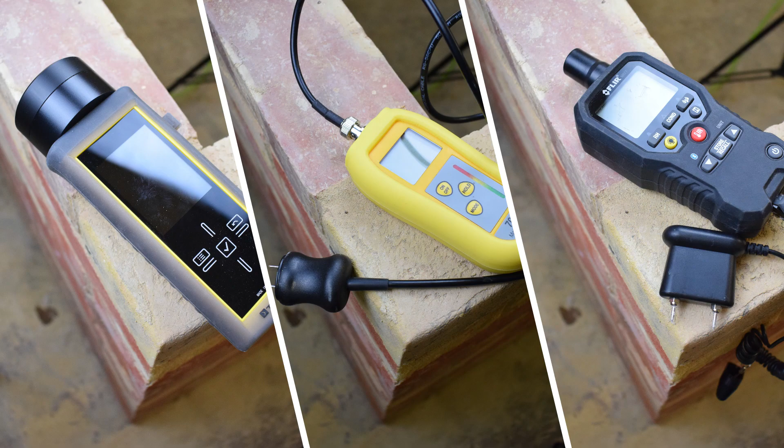This is going to be our first in-depth video where we're doing a bit more focus. Like I said, we've done the intro, now we're really getting into the nitty-gritty. So today's video, we're going to look at moisture meters. Every surveyor is pretty much armed with one, and this is why we think it's a good place to start. We're going to be looking at an array of models and comparing and contrasting them on our test wall.

So we've got a complete array of different units to look at. We're going to be going from old to new, not necessarily in that order, but we've got some old stuff, some new stuff, some really high-end stuff, and some more budget models as well, so we're going to be looking at how they compare. We've also got some that work with the pin function, and then we've got some that are looking at the scanner pads on the back, so we're going to be looking at how they compare and contrast as well.

We know there are obviously limitations to each of those, but we're going into a bit more detail, and hopefully once we've got our results we'll be able to explain that in more detail as well, assuming we get the results we want to, of course. What we'll look to do is try and get some results up there so you can see a table as to how they all compare and the different readings, and we're going to be as completely honest and transparent as we can. So what we get, we're going to hopefully show you, and you can see how they compare and contrast.

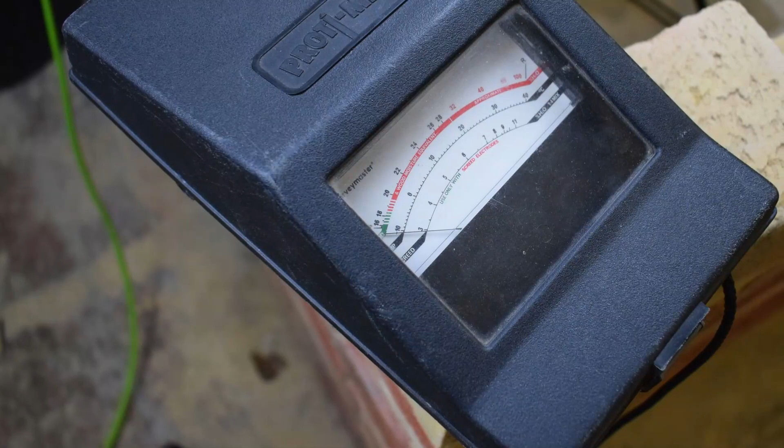So I'll look at some of these meters in a bit more detail now. We're going to start with probably our earliest model that we're going to try and test, a Protimeter SurveyMaster. If you recognise this, you're probably showing your age as well - an older model, pins only, very early, I think from sort of the early 80s, well before my time, of course. Something a little bit more modern is a Protimeter Mini, again with a pin function, and we'll be looking how that compares as well. This is from the early 90s, something like, I think 91.

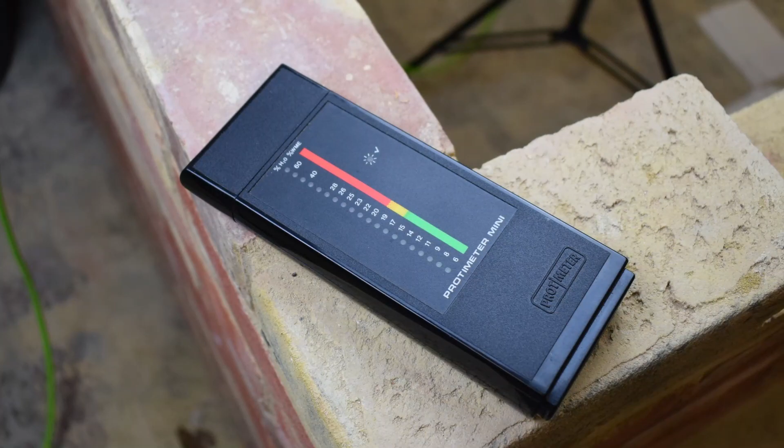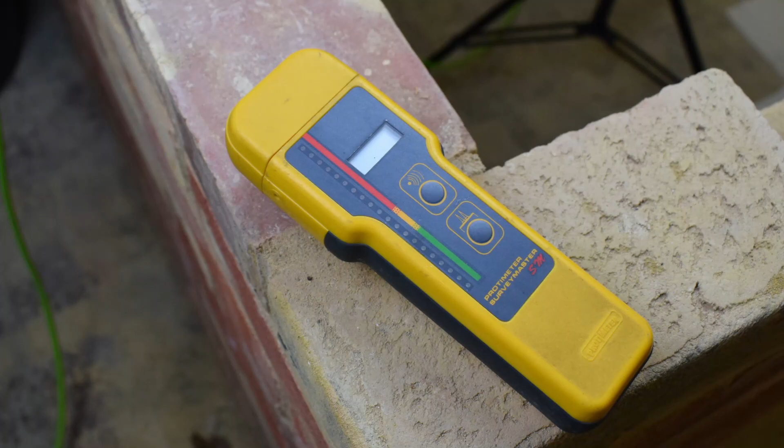Some of the more modern ones, again, Protimeter - this isn't a plug for Protimeter, but it's one of the more common models or bigger brands on the market, so that's just naturally how we managed to pick up a bit of an archive of Protimeters. So we've got a SurveyMaster SM, quite a familiar one - I'm sure most of you might even still have this model and still be using it, with pins and scanner pads as well.

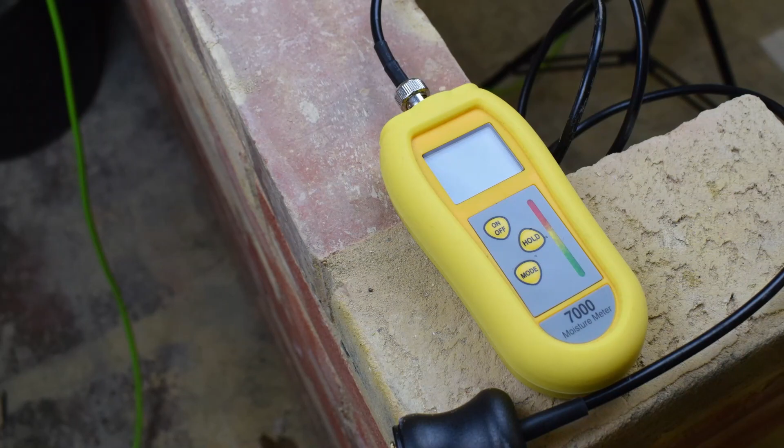One that's a bit more unusual, this is an ETI moisture meter. It has an attachment with pins, not too dissimilar to some of the ones we'll be looking at. Not overly expensive, but we'll have a look and see how it compares.

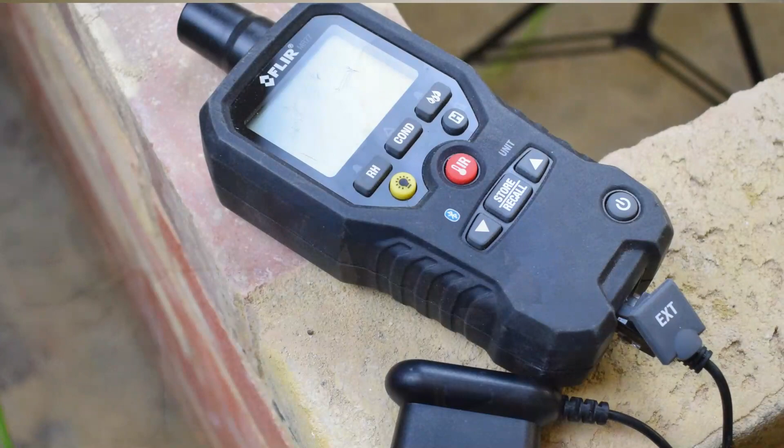This is sort of towards the higher end, a very good model. It has additional functions as well, so relative humidity and things like that. Obviously not going to look at that so much today, but it's on there, along with a surface thermometer.

And the same with the E-Tech as well, not too dissimilar to the model we've just looked at, but even from the casing you can see it looks very, very similar. But how do they compare in real life?

The anomaly in the group is probably this one, the Trotec, I think it's called a T660. This works off a slightly different technology, a microwave meter. It's not ideally set up for what we're going to do today, but we'll have a go with it, have a look, and see how it compares and contrasts, and how the readings differ.

So just to give a bit of background as to what we're going to do today in our experiment: we've got a test wall. What we're going to try and do is take readings from various heights up the wall, three locations for each of the meters. We'll take one from the skirting, one just above that level at the mason plaster level, and then one towards the top middle of the wall. We'll plot the results up there so you can see it, so we'll have a skirting, height A, height B, and we'll record that.

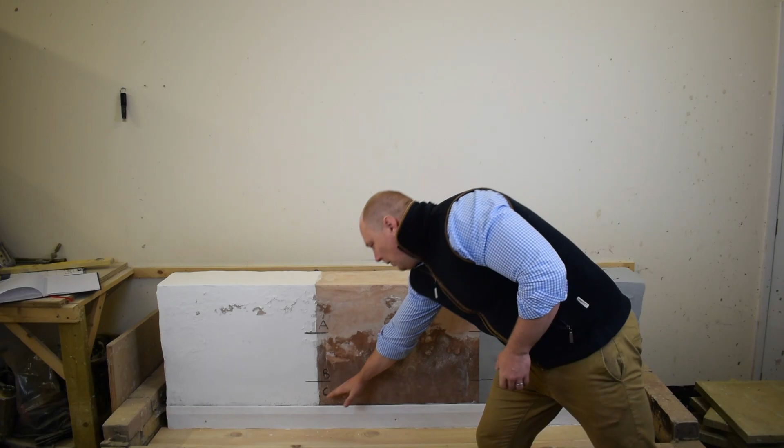You'll now be able to see what we've done is we've marked out the wall. Very conveniently, above the floorboard level it's around 600 mil, so we put markers every 200 mil. What we'll try to do is make sure all the readings we take are in the same area, so we can compare and contrast, one from skirting, one from section B or C, then one from section A, and then we'll plot them for you.

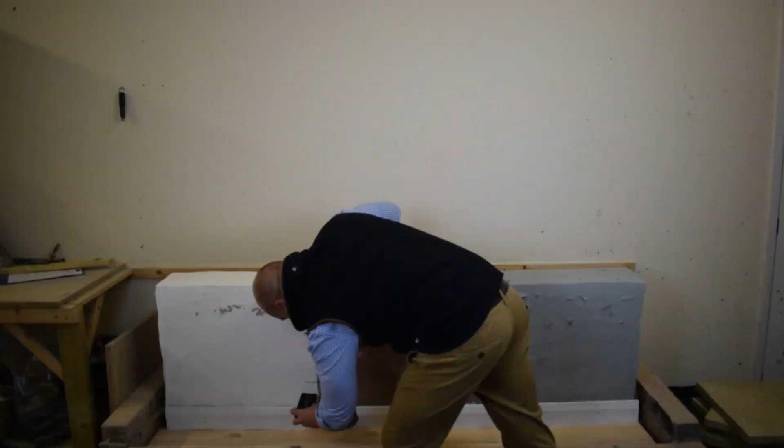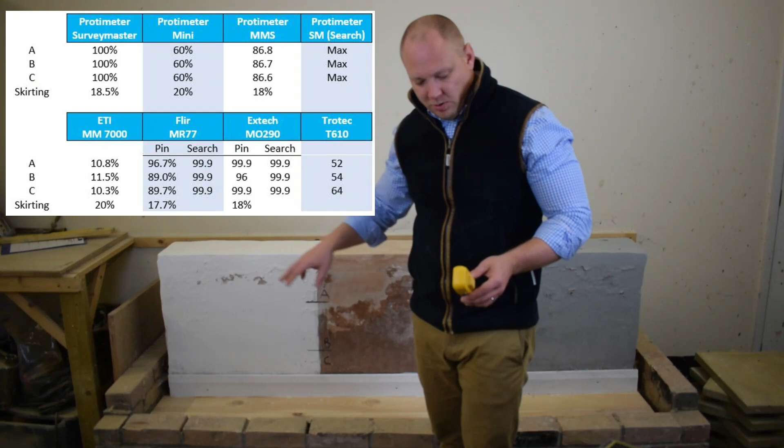A lot of the meters we've used so far have only got the pins, so most of the readings we've recorded so far are just on that. Some of the more modern ones we're going to start looking at, such as the Survey Master SM, have the scanner and the pad, so we'll be taking two lots of readings from these at each of the various heights. So you'll see us changing tack slightly, using the pins as well as the other facilities.

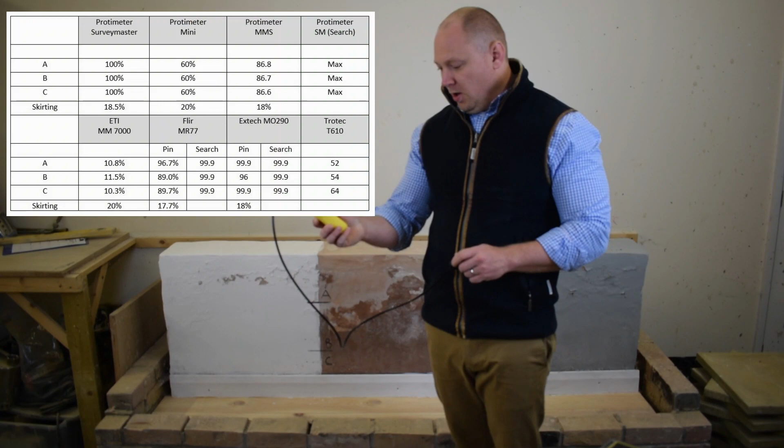So this is one of our more modern moisture meters, the ETI Moisture Meter 7000. It again has the pins, and there are various settings on this. We're going to use it on the plaster mode while we do the plaster, and then adapt accordingly for the skirting board when we get there.

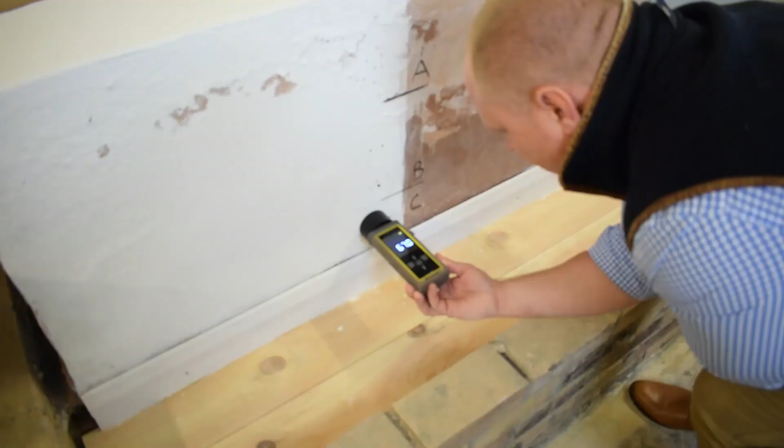So this one's the Trotec, our most modern acquisition. We have to let it calibrate for a little while, holding down the button. In theory, you're meant to use this in an upright position. It requires a monolithic structure, so you need the depth of the substrate to be around 200 thick, which we've got around there, so we'll see how we get on.

So we've taken all our readings from our wall, as we were kind of expecting. There is a bit of an array in the results, and that's for reasons we'll start going into. You'll notice, unfortunately, as is the joy of working with some of the old equipment, you don't always get it to work perfectly, so some of the moisture meters haven't worked entirely correctly. But that's all part of the experiment, and goes to show we are doing this properly and live, and we're not trying to pull punches or hide anything from you.

One of the moisture meters, unfortunately, on its pin mode just didn't work, but there we are. So we've got our wall, and you can see we've got varying results up the wall, which I'm sure won't be a great surprise to any of you. Moisture meters are virtually all calibrated to timber, which is why for the results we got from the skirting board, there is a great amount of consistency. They are all very, very similar, within a few percent of each other, which was entirely what we were expecting.

I was expecting a slightly higher reading, but unfortunately I think where the skirting has got a bit bowed, perhaps, the readings aren't quite as high as what I was anticipating. What it's shown us is that all those moisture meters, when working in timber, give us a reasonably accurate scale. They were all slightly elevated, with one or two peaking around 20, which is where we'd start getting a bit concerned.

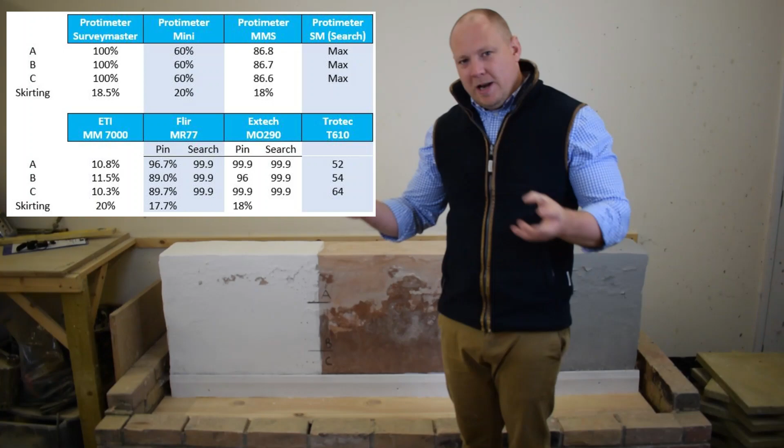Any moisture meter is only indicative - a high reading tells you there's something to investigate. We knew there was something to investigate, you can see the dampness. So actually the readings we've got are no great surprise. It's telling us it's got a wet wall.

Actually the figures quoted on the masonry itself, the plaster, are almost meaningless. All it's telling us is we've got a problem, we need to investigate, we need to do some other testing, and that leads us on to the other series of videos we're going to be doing. So this is our first one.

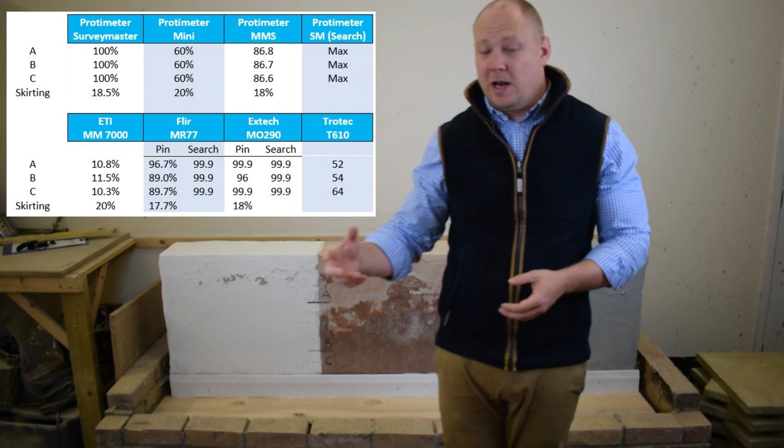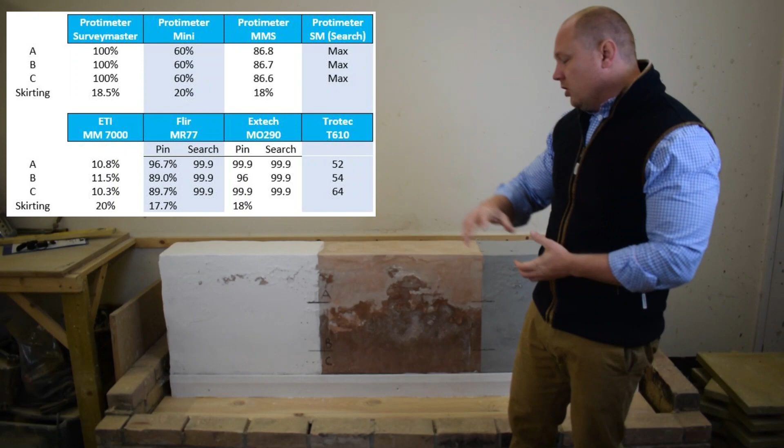We're going to be doing some more interesting and quirky stuff. This was sort of an initial taster, and it's got us to what we're expecting to get. Moisture meters are only as good as the person that wields them. You shouldn't be looking at single readings in isolation - you should be looking at indicative profiles.

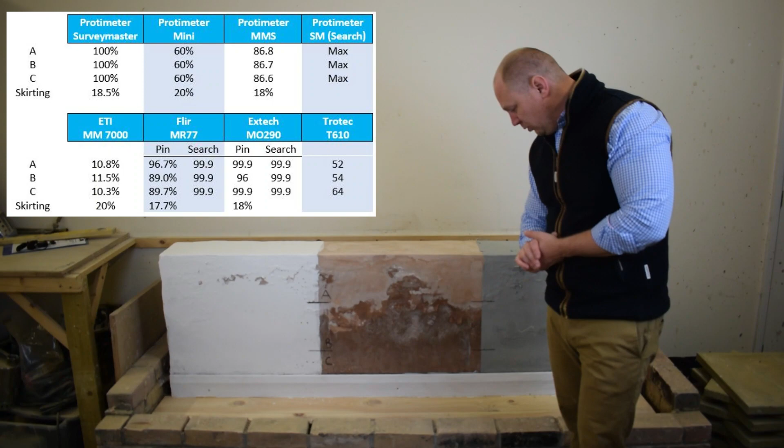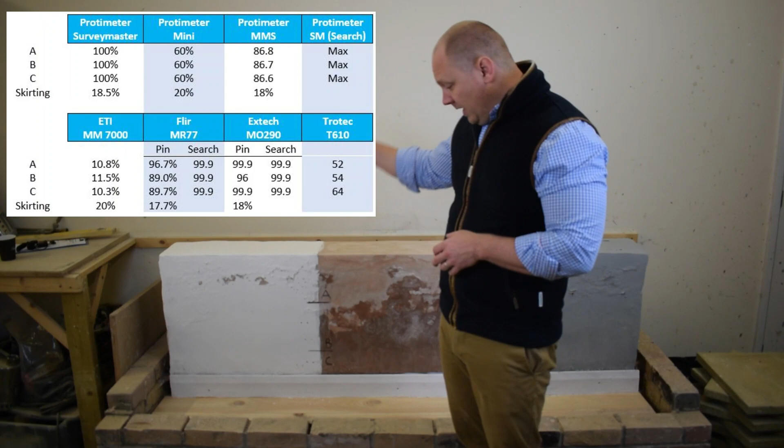Unfortunately the section of wall we've got here is quite small. We're only going up to 600mm from the floorboards, and you've probably only got an extra 200mm below that. Another important consideration with the moisture meters is that it's the profiling that matters and the distribution of the readings.

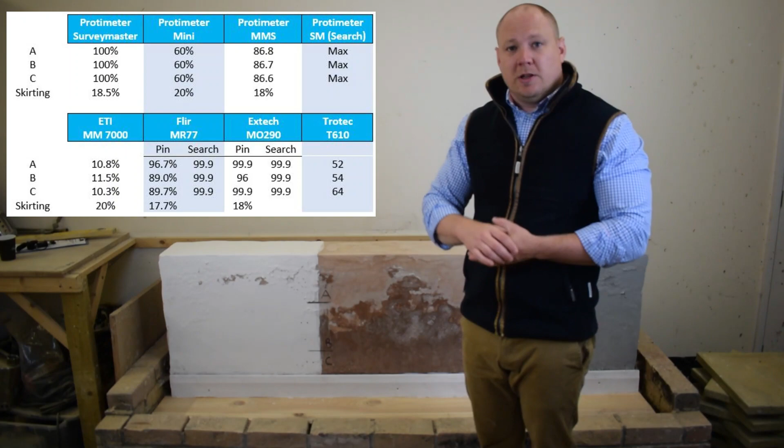If you're getting a negligible reading on a moisture meter, then there probably isn't a problem. If you get an elevated reading, then it's probably cause for more investigation. That's what they're used for - they're there to give you an indication of whether there might be a problem, and you should be using it in conjunction with your visual evidence and things like that.

The other thing they're really limited to is they cannot tell you where that water is coming from, if it is water causing it. It could be condensation, it could be rising damp, or it could be rainwater coming through the structure. All it's going to tell you is whether there's resistance through the meter - it will give you a beep or an elevated reading, but it won't tell you where that moisture is, or what the cause of it is.

That's where the knowledge of the surveyor comes in - that's part of your survey. This is where you should be looking for external defects, looking for the presence of damp-proof courses, what type of damp-proof course it is, and whether it's been compromised.